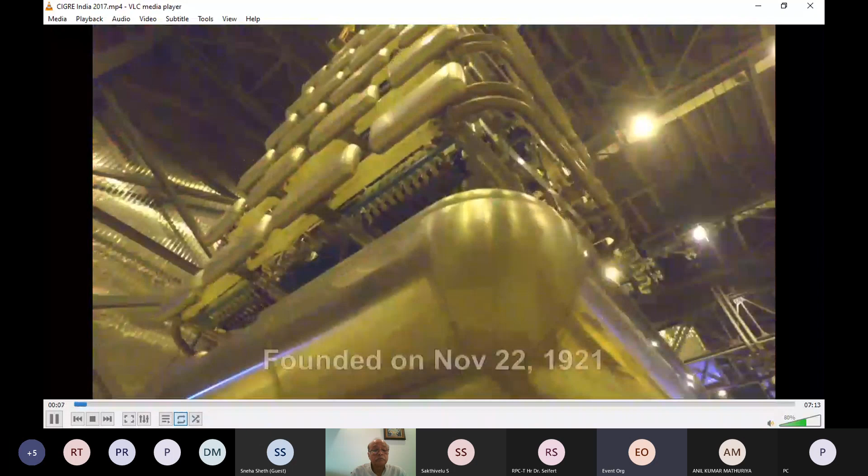CIGRE, the International Council on Large Electrical Systems, is the World Forum for Power Systems, founded on November 22, 1921 in Paris. CIGRE deals with issues related to the development, operation and management of electric power systems, as well as design, construction and maintenance of equipment and plants.

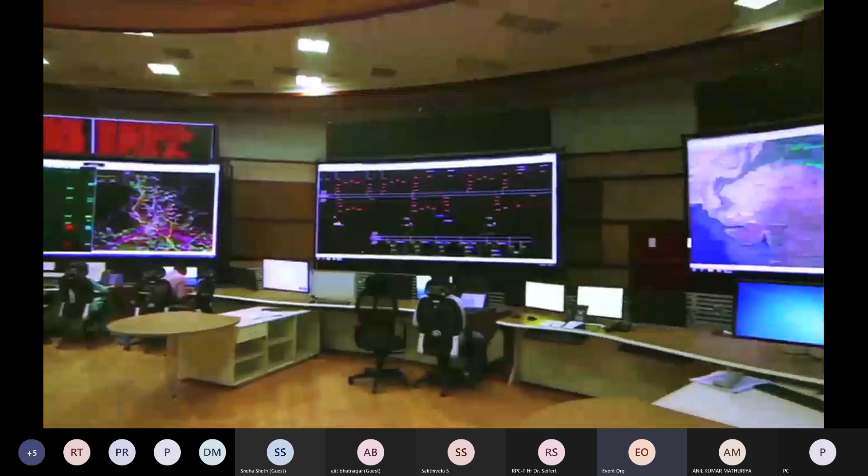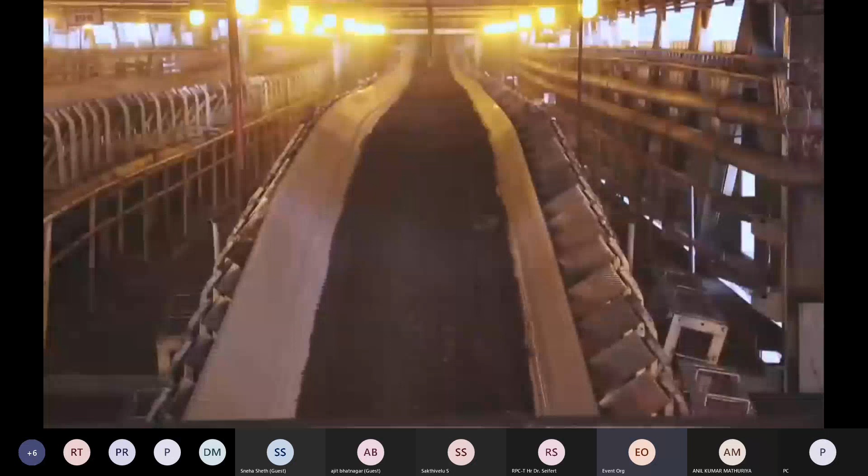The mission of CIGRE is to work with experts from all around the world by sharing knowledge and joining forces to improve the electric power systems of today and tomorrow. It mainly aims at coordination of research, exchange of experience, and scientific and technical information on the operation and design of electric power systems. CIGRE is an association that promotes the exchange of the latest generation of technical knowledge and brings innovative ideas to support industry needs.

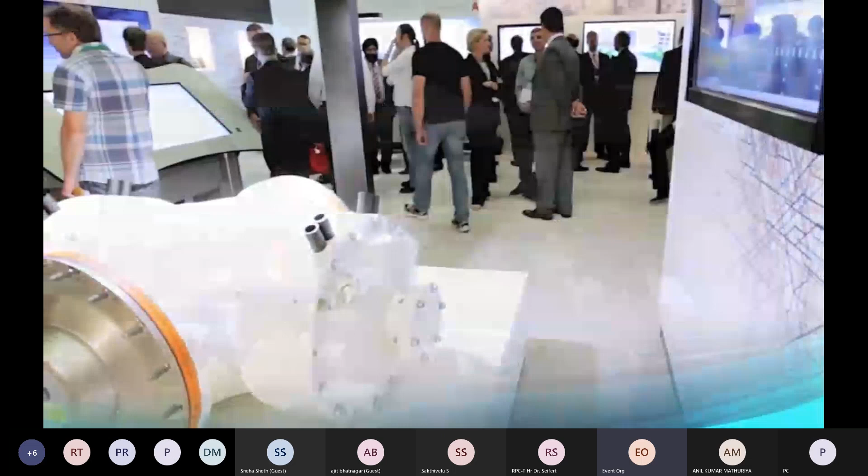CIGRE's strategic directions are best use of existing systems, unbiased information for all stakeholders, environment and sustainability, and future power systems. The challenges are renewable energy sources, growing environmental requirements, limitations to building new transmission infrastructure, architecture of networks, operation of existing power systems, transmission of large amounts of power over long distances, cyber security, and intermittency of renewable power generation.

CIGRE operates through 16 committees on different subjects having members from various countries. These committees are divided into 4 groups. Group A, Equipment, with study committees A1 Rotating Electrical Machines, A2 Transformers, A3 High Voltage Equipment. Group B, Technologies, with study committees B1 Insulated Cables, Overhead Lines, Substations, HVDC and Power Electronics.

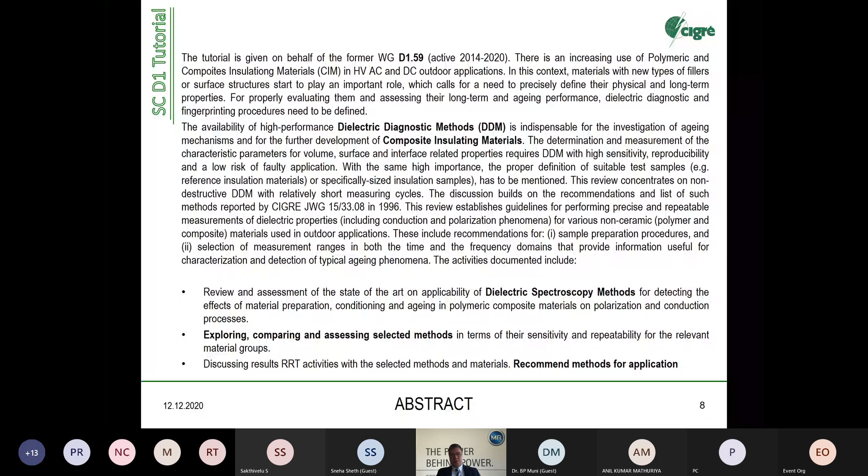So we will talk about composite insulating materials. Composite insulating materials are today considered an emerging technology. If you look into cable insulation, composite insulators, dry type transformers, all these oil-free, SF6-free apparatus work with these composite insulating materials. And the uncertainties are here.

That's one of the main troublemakers in composite insulating materials, which are interfaces. Interfaces can be a macroscopic interface between silicone and epoxy, or between metal and this composite material, or you can also have microscopic interfaces. Microscopic interfaces are interfaces between a matrix system and a filler, for example quartz powder, alumina, or glass fibers. And interfaces may be very complex.

So these are the standard ones taken for theoretical investigations. Typically you can have a normal interface or a normal-directed interface. You can have a tangentially directed interface, or a mixture of both. When you think about glass fiber reinforced polymers or mineral filled polymers, you have a very diverse and wide and complex arrangement of interfaces. But to understand which kind of interface is dominating, these three models, normal, tangential, and normal-tangential, are defined.

Going back to the actual polarization effects in solid dielectrics, this is taken from a book, from lectures of professors, of course - it's not a new invention. What we have to look at today is time starting from some microseconds to hours, months, and years. The polarization mechanisms behind are mainly driven by space charge polarization, so ionic polarization, hopping polarization, and orientational polarization - dipoles. That's the range we are looking into when we talk about composite insulating materials.

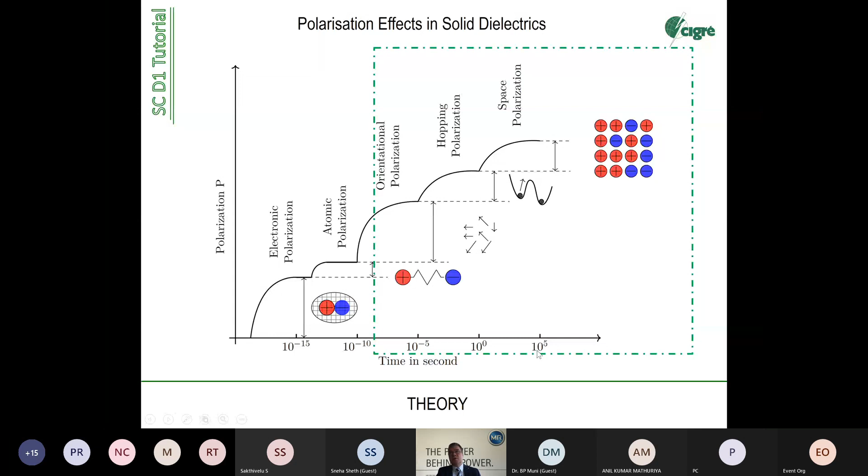For example, in this range of space charge and ionic polarization, we mainly talk about the Maxwell-Wagner effect. Maxwell-Wagner effect is a dominating effect in composite insulating materials since it acts at interfaces - you charge or discharge space charges or ionic particles in and along interfaces. So the Maxwell-Wagner and so-called accumulator effects are the main effects we have to look into. And what we also can see here is that we have to look at long times. Long times means low frequencies.

So after reviewing the available procedures and methods, we found very nice methods coming mostly from universities and scientists, which are called time domain spectroscopy, TDS. It's a very interesting way to analyze materials. It's given here on the left side as a very simple scheme.

So you have a stimulation - normally a step voltage - and the step voltage has a response which is called current response, and this current response is given by the quality and nature of the dielectric. Here's the theory behind it: you have a polarization contribution and a conductive contribution - here's the polarization, here's the conduction. You normally use a kind of Laplace or Fourier transformation, DFT, to transform the response function into a spectrum, into a frequency spectrum, and from this frequency spectrum you can see what kind of effect is in the material.

It's most probably the most effective method because it's not time consuming and easy to apply. What are the difficulties? Difficulties are measuring the very low currents - these currents range from nanoamperes via picoamperes to femtoamperes. So the main challenge here is to have a noise-free, distortion-free measurement of such low currents. This is possible in shielded arrangements, but we found it's not so good in industrial applications because the required conditions are hard to realize.

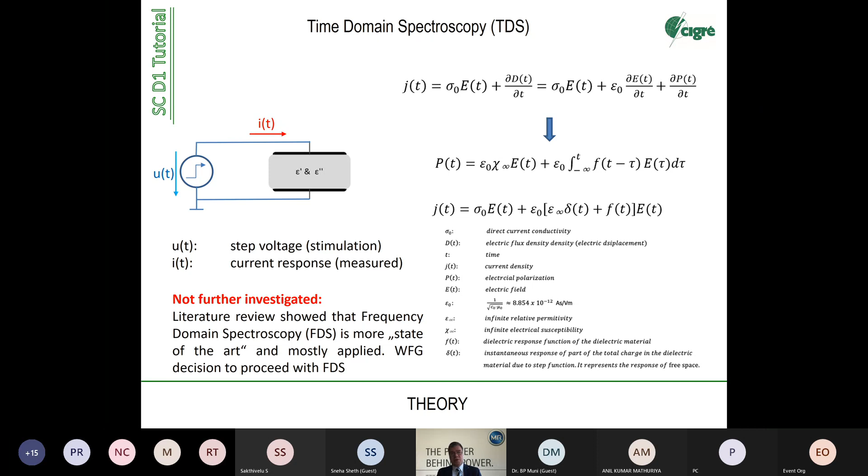Interesting methods - you find a lot of papers given in the literature review, and it's also used in transformer diagnostics, by the way. It's very close to applications, but for materials, we selected this method here.

It's a frequency domain spectroscopy, also called FDS. In FDS, you take a voltage phasor as a stimulation signal, and you get the current phasor as a measuring signal, as a response - this is a very simple arrangement. You normally vary the frequency, starting at very low frequencies in the range of some millihertz, then sweeping into the kilohertz and megahertz range, and you get this current response function, which is also divided into a capacitive part - a response given by the permittivity - and also a contribution given by the conductivity.

So both methods consider conduction effects and polarization effects. From this calculation, you can derive the complex permittivity, which is epsilon 0 multiplied by epsilon R1 and epsilon R2, the complex function. In this complex function, you can distinguish between polarization and the conduction part. The conduction part is given here. Both are depending on frequency.

And so derives the tangent delta. Tangent delta is also known as loss factor. The loss factor can also be split into the polarization part, so it's the dipoles where you lose energy by friction, and you also have a loss by conductive mechanism. So it's a very clear and comprehensive theory behind, and it's just about the evaluation of the complex permittivity.

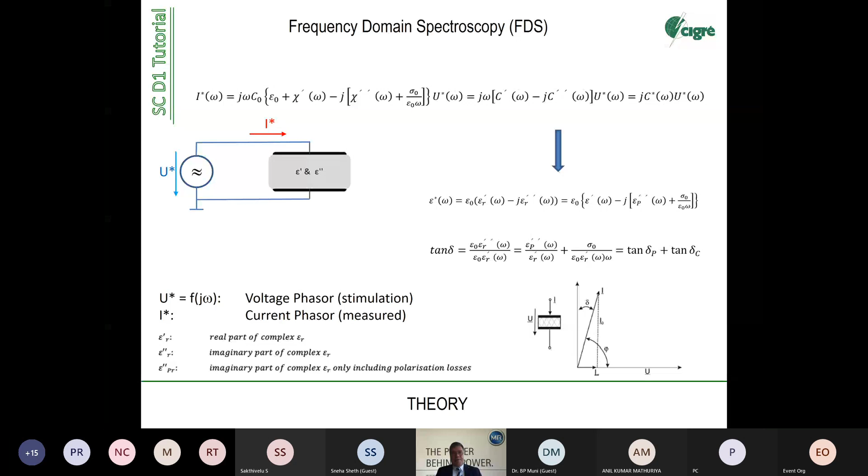So what can we do with the results? This is mainly from a very good book made by Jonscher in the UK, from a Chelsea Dielectrics Group, a dielectric study group that worked in the 1970s and 1980s, which derived a lot of physical mechanisms that can happen in moisture-affected or aging-affected polymers and composite materials. This is a summary of what is written in this book.

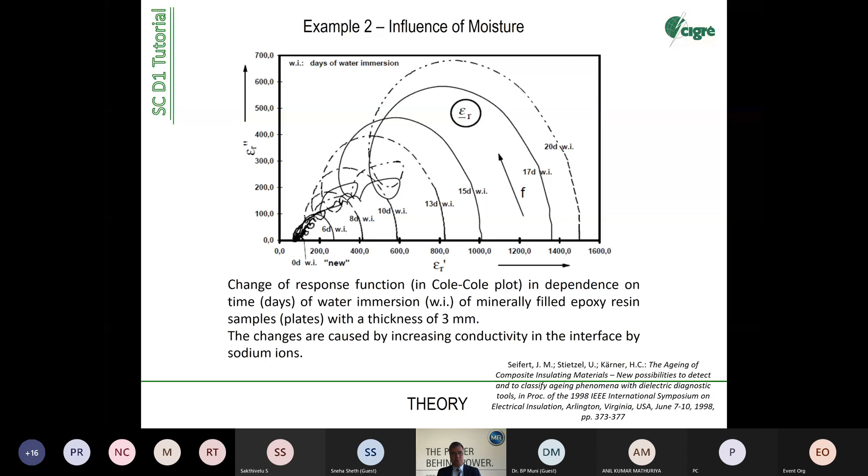example, what is already existing, then work with this literature review. And we have in the brochure 2 references. One is the normal one, starting from 1 to the end, and there's the E1 to E33 or 38, and the E references are for examples. So don't be confused if you read the technical brochure. This was done by intention to distinguish examples from the main literature.

Okay, so we selected the frequency domain spectroscopy. I'll come to this later, why. And also we selected the contact-free method. So you know that in

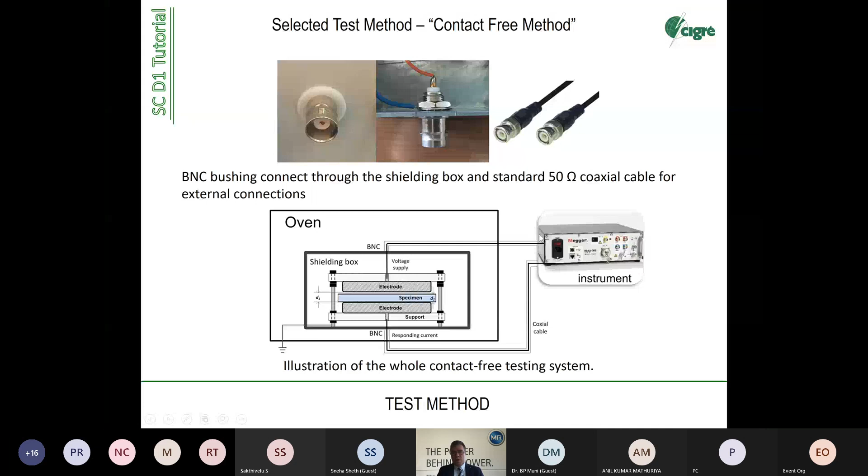Sensitivity analysis - this was really thanks to Professor Derek Oliver from University of Manitoba in Canada, who is in my opinion one of the best experts in this field. He did very theoretical work, also assisted and supported by experimental work in the background, and found that the spatial geometry, given with the delta dr, also has an impact on the accuracy of the correction factor.

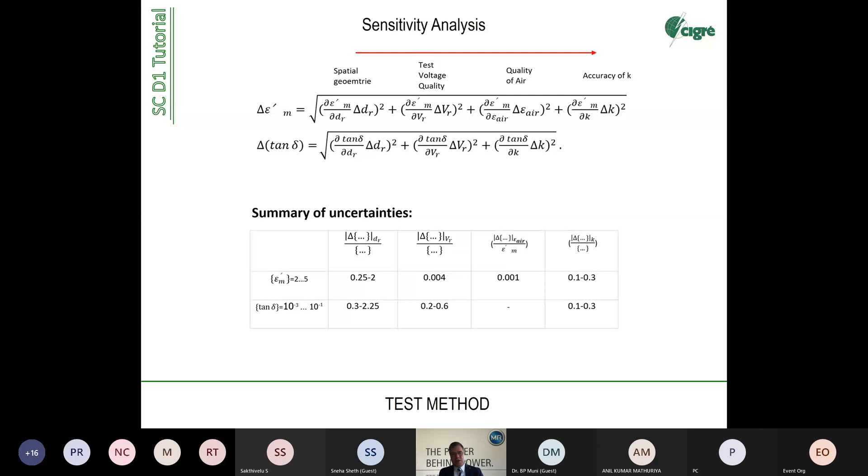For this round-robin test, a sample number of 5 was good. I think for later practical applications, you will not measure 5 cable slides or 5 cable samples because you cannot afford to do it, or you don't have the time or the resources. So this is one thing we have to look at - we have also recorded this in the lessons learned.

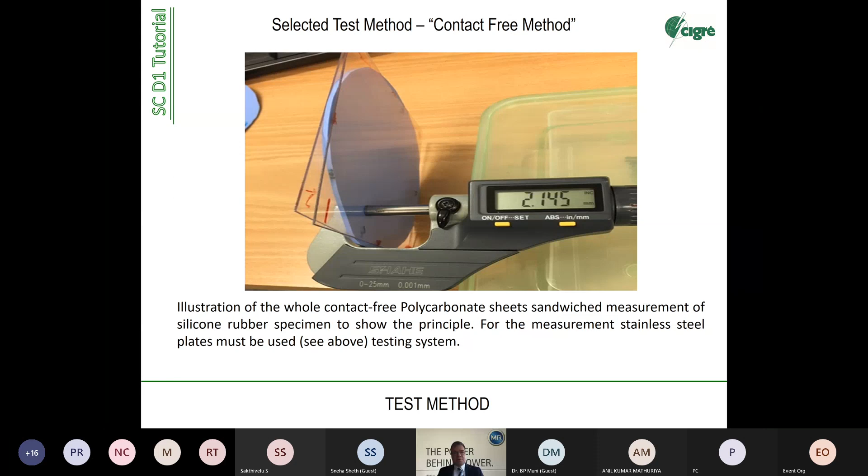Now the theoretical part is more or less finished, so now it comes to the test procedure. In the work on fingerprinting and in the tracking and erosion experiments we did in D127, it was found that we should have a really good test specification. With the test specification and the quality of the test specification, people start to work.

For example, in this working group, we had 7 participants sitting on different continents. One lab is in Canada, 2 were in Germany, 1 in China, 1 in Sweden, 1 in Argentina. So you're not working in one group, you're working under different conditions - the temperature in Canada may differ from the one in China, or humidity conditions may differ.

This is intended. Exactly what we want to do is apply this method, or explore this method, under different conditions, done by different workers, under different control conditions. This is why we do this, because we have to develop a method that is in the end representative, repeatable, and cost affordable. So we have to apply this method in an industrial way at any site we can imagine in the world where we want to get this value.

This is one of the rules, or the 4 rules of IEC. If they are not fulfilled, such a method will not enter the world of IEC standards.

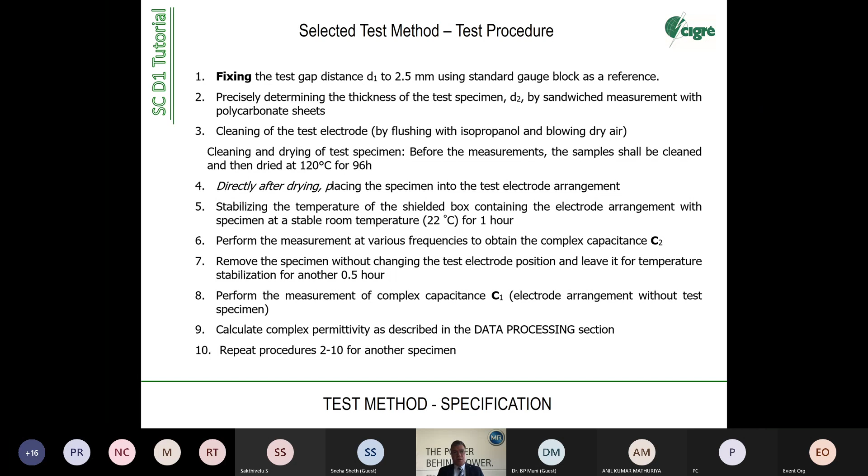Some key hints here: do not move or adjust the electrode system after the reference measurement. For experts it's clear, but lessons learned showed it was different. Fix the gap distance to 2.5 millimeters. Use a shielding box to avoid external interferences. Connect via BNC. Do not use an oversized specimen.

Sometimes you say, okay, my measuring area is 100 millimeter diameter, so take a big plate and put it under the electrode. Don't do it, because it affects the factor K due to the stray field. Determine precisely the average thickness of the specimen as well as the air gap, as these are the main error modes or error contributors. Clean the specimen, and always check the original capacitance data.

There's a self-verification of the equipment, self-testing you have to do, because sometimes these electronic devices are not in a zero status. Secure proper grounding of the measurement equipment. Avoid loose contacts, as these are potential failure points. Maintain stable environmental conditions regarding temperature and mainly humidity during the test. Store the samples afterwards in a dry area, maybe in an oven, if you want to repeat the measurements, or as part of a round robin to repeat it after some days.

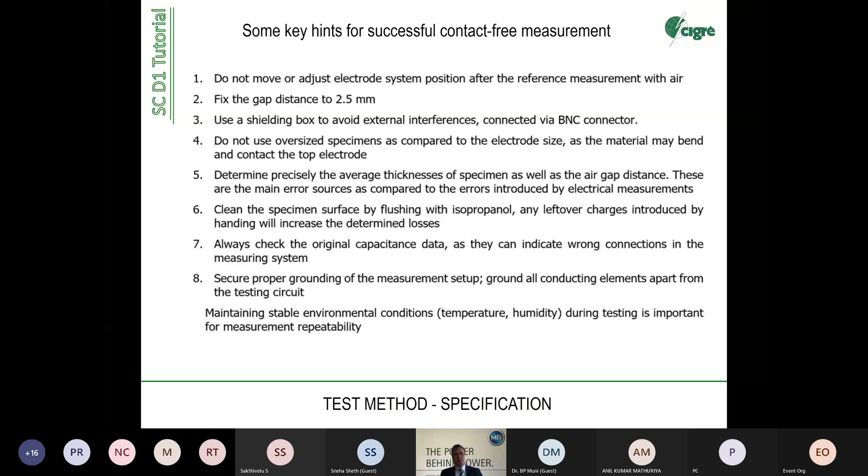Actually, this was our main scope: to work with this kind of characterization of new materials. We had 14 working group meetings, two per year, and the last ones were virtual. You can imagine that when a large group of 30 people or more sits together, a lot of ideas come up. Some of these ideas are good, sometimes we followed them up, sometimes we forgot about them, but here was a good one.

It's water immersion, because as I mentioned before, the microscopic interfaces in composite insulating materials are mainly affected by moisture. So we can trigger potential aging mechanisms with moisture, stressing the material in an easy way. Most probably this is also the dominating aging effect that we see in real field applications. So we defined a procedure: what is water immersion? We dried the samples first at 120 degrees for 96 hours.

With contact-free measurements, we want to measure. We use distilled or deionized water and place the test object in water for 50 days at room temperature. You can even promote the aging if you increase the temperature. There's a rule: if you increase the temperature by 10 Kelvin, according to Arrhenius, you double the process behind it. So if you have a diffusion effect or mechanism depending on this equation, increasing by 10 Kelvin doubles the speed of diffusion of water into the material.

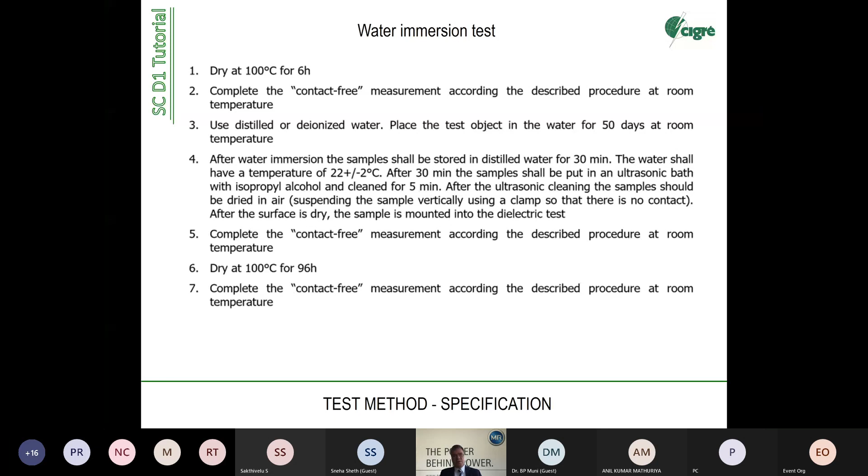Now most of the people are not attending today, but these were the real workers. If you perform a round-robin test, you have to have somebody who makes a test, to spend time, to spend the money. In most cases these were universities, such as University of Manitoba in Winnipeg, Canada, and Chalmers University in Sweden. It was Professor Gubanski, maybe you know him, he's now retired, but he's a great expert in this field of dielectric phenomena.

Professor Kornhuber, together with Professor Bersch from Zittau, are also deep in the field of dielectric materials and testing. Germán Salvo from Argentina, from Edenor, whose company works mainly in diagnosis of equipment. Also the Technical University of Munich, Professor Kindersberger and his team. He's also retired now; at that time he was chairman of SC D1 and main initiator of this work.

Not everybody tested the same materials, but most did tests with HTV rubber, a commercial grade silicone rubber used mainly in composite insulators and cable terminations. Liquid silicone rubber, same application range, going also into cable systems. EPDM from cables and also from older insulators used as housing materials. Epoxy resins, a wide group of materials applied in medium and high voltage equipment, for internal insulation. Most of these epoxy resins are filled with mineral filler, with quartz powder, to set up the desired conditions. So this was the round-robin test.

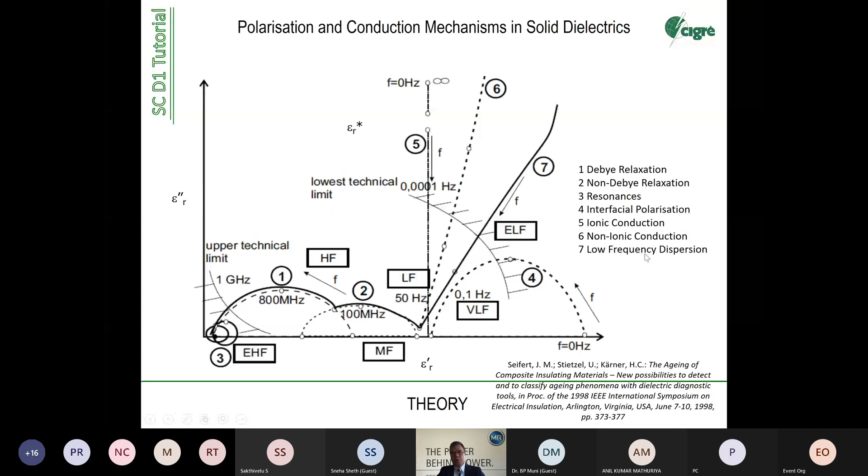So what you see in this curve is coming from here, from the lowest technical limit down to 50 Hertz or even a little bit more. So we go into kilohertz or megahertz area, but we are somewhere here in this falling branch of the so-called low frequency dispersion curve. I go back to the other one, just to give you orientation where we are. So it fits with the theory, and we are looking to the right signal, to the right range, because we are searching for interfaces, for ions, for molecules that are moving, for slow moving effects.

Here, what you can learn is that the scatter seems not to be so high anymore, but you can see a clear tendency. So all test labs for this material show more or less the same dielectric fingerprint.

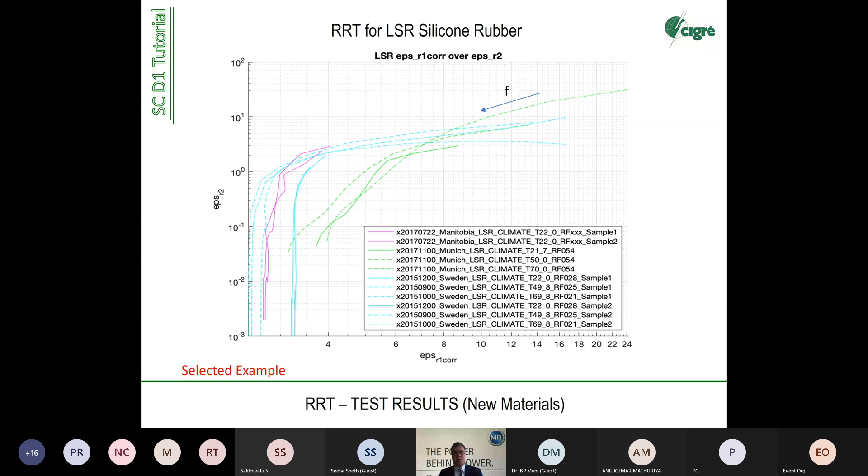Here we investigated an HTV material. We have to say this material is filled in comparison to the liquid silicone rubber. Liquid silicone rubber has no alumina hydroxide filler, so it's a pure material, more or less, with a low amount of interfaces, actually theoretically with no internal interfaces, but they also use some kind of silica to get a mechanical property.

So also these materials have some kind of interfaces, but a low amount. This material here has, by material formulation, a higher amount of internal interfaces, just given by the filler loading, which may be between 50 and 60%. 50% of the elastomer is mineral filler. You can imagine how many interfaces you have between the fillers and the polymer when you think about these particles being in the range of 10 to 20 micrometers. So these are areas of, I think, some soccer fields that you get in a small sample.

Here, very promising at 50 Hertz, very small scatter, also with the air reference method. And in the low frequency range, you see a little bit higher scatter, but the tendency is very clear here, with lower scatter than with the LSR.

Why? We think, or we concluded, that the interfaces give a clear signal, a clear process behind the response, and when this happens, you really measure something that is really going on. So it's not determined by scatter, it's more determined by a real physical process.

Same here, it's the loss part, the imaginary part, the falling tendency. Fits perfectly with the theory. Also, what's shown here is the temperature.

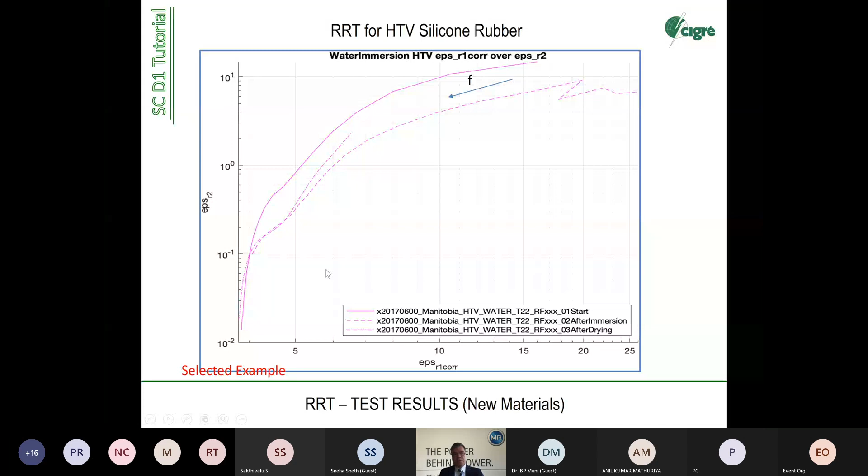This is a signal for EPDM. Also a sharp dielectric response. You have to understand that EPDM material is formulated in a very similar way to HTV silicone. It contains normally also alumina hydroxide filler.

Alumina hydroxide is a polar filler. By its nature, it has a kind of polarization, and of course you have the contribution to the interfaces.

Alumina hydroxide is not only alumina hydroxide, it contains also a lot of water by nature, not only from water immersion or water penetration from outside, but when you manufacture this material, you have a certain amount of bonded water inside. This is by intention, because this filler is used as a fire extinguisher or to set up the tracking and erosion performance.

Tracking and erosion performance is actually like extinguishing fire, extinguishing the arc. So you're using the same philosophy in order to get good tracking and erosion resistance as making a material non-flammable.

That's clear, or at least for us it was clear, that we can have a real interpretation of the results. Also a very strong response here, a clear tendency. There's one, the red curve, a little bit moving out, but I understood later that in China they used not a commercial equipment, they used one built at the university. It was done by Tsinghua University, Professor Liang Xidong.

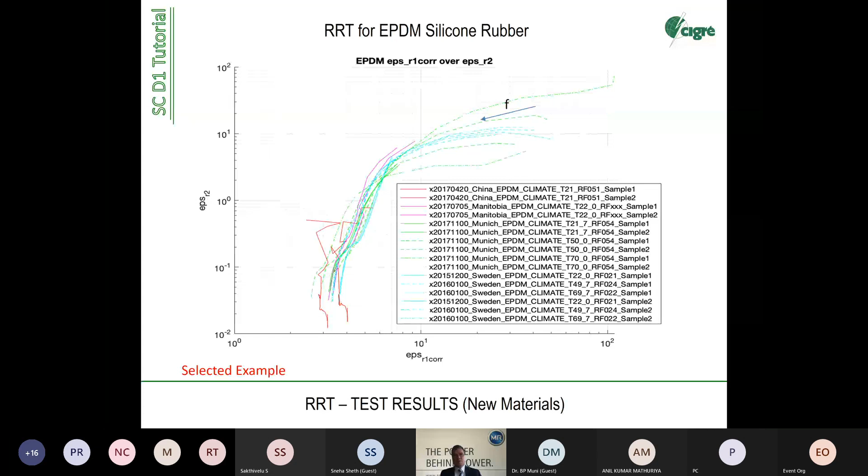Mineral filled epoxy resin, that's what I showed you before, these pictures here. These were the same kinds of materials.

You see one material, because of the interfaces, may be susceptible to electrical overstress. Electrical overstress means treeing, means step-by-step carbonization and growth of channels that may lead to failure after time, so aging time.

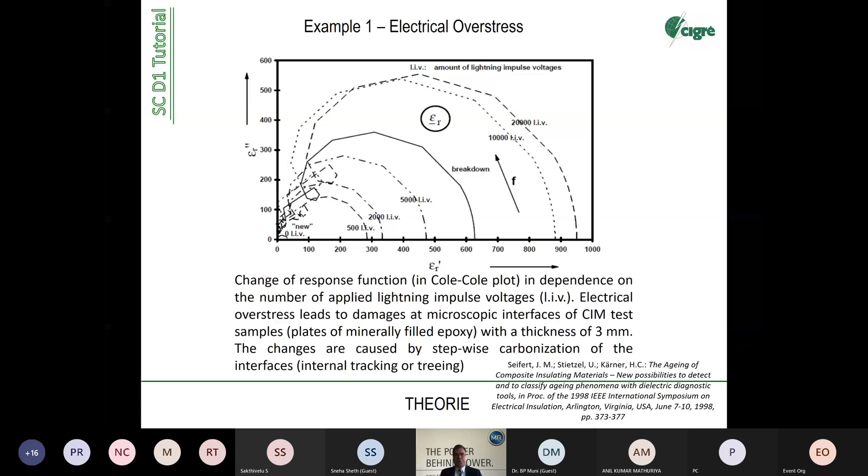This relates also to the inverse power law. You can load the material and it will not show any kind of aging until you exceed the so-called damage limit. Damage limit theory also applies for materials. If you always stay underneath the damage limit, so the voltage stress or the water stress is lower than the damage limit, you don't see any aging. Same here, that's the curve we have to look at, and the round robin test.

You see this is a good quality material because you have not a very strong response, so the response is relatively flat. This is also the case at different temperatures. The reason is simple: this material was a high quality commercial grade using fillers of low alkaline content, low sodium. Sodium is the main contributor to the problem.

Potassium is not so critical because it's not fast moving, but the speed of ions is higher with sodium. So you have to take care that your fillers have low sodium content, and secondly, the fillers must be treated with silane at the surface. Silanization and low alkaline content makes a good filler for a good composite material. Same applies for glass fiber reinforced material, same applies for all kinds of mineral filled materials. Lessons learned here: the quality of materials can be checked with these methods in a very good way.

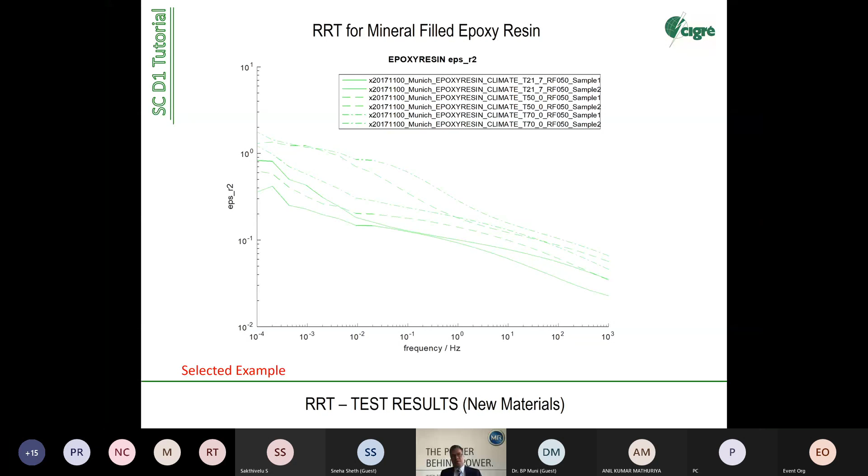Imaginary part also in a low range, with a relatively flat response compared to the others, speaks for the same feature: good quality material. You see again the Arrhenius characteristic when the temperature is changed. But you still see a response, you still see the Maxwell-Wagner effect is active.

Can also be confirmed here. But with all the data, what do you do at the end? You don't need to be an expert to look into such diagrams and decide whether it's good or bad or what you see from it. For later applications, we have to bring this to a quantitative figure, so we can say, okay, here we see a kind of effect, or we see this kind of effect, or we see no effect.

For this reason, we applied the theory of low frequency dispersion. Why low frequency? Because we see in the low frequency range the Maxwell-Wagner effect. We see all the effects that are interesting and important for composite insulating materials.

Why this kind of dispersion, why don't we use Maxwell-Wagner? Because Maxwell-Wagner is not sufficient to describe what's really going on in the material. So we selected a model from Jonscher, number 13 in the references. Very good to read if somebody has an interest to go deeper into this very interesting field of physics. Read this book and you will find a lot of details inside. We have taken out this equation for evaluation.

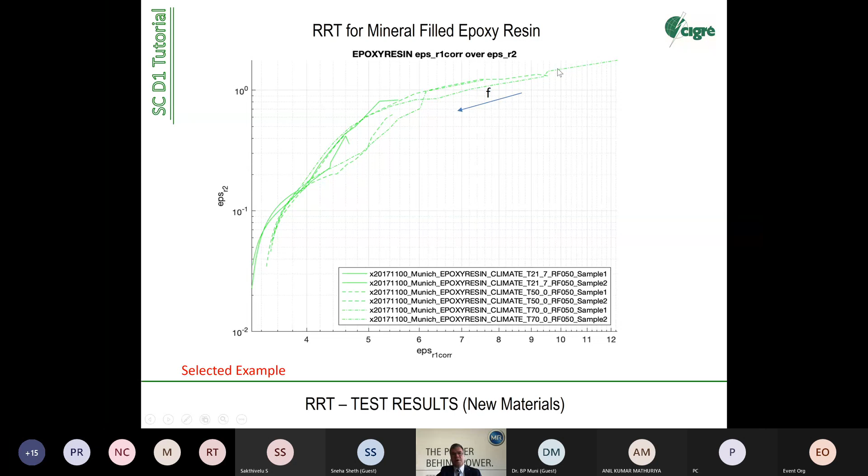And thus we worked with just one N. This N we have to see - N is actually, you have to make a straight line here, an extrapolation. Your software is doing this, so you have to determine the angle of the slope, and from this angle, from this arctangent, you determine by cosine of arctangent from these values in the logarithmic figure, you get out N.

So Stefan has done this by means of self-made computer software in order to have all diagrams under the same observation and under the same evaluation.

And in literature, you find the following values. So normally I explain how you do it: you take this slope, from the slope you get the angle, from the angle you get with the cosine function, you get N.

With N, you can look into Jonscher's theory. For example, if you see an N of 0.8, you have a dipolar response. If you see two modes, like here - we have some with two modes - then we have a dipolar response, and the lower one is a conductive response. So it's a mixture of two. You can filter out different modes of polarization and conduction.

This is also a lesson learned. We need a software like an expert system to find out, to detect what's in your materials. That's for the next group, for the continuation of this work. We need an automatic device that gets out of the plot these kind of N values. This is also given to the big suppliers of equipment like Megger, or I don't know what the names are - the companies that supply such test equipment. They could have a software enhancement to get a module for dielectric diagnostics.

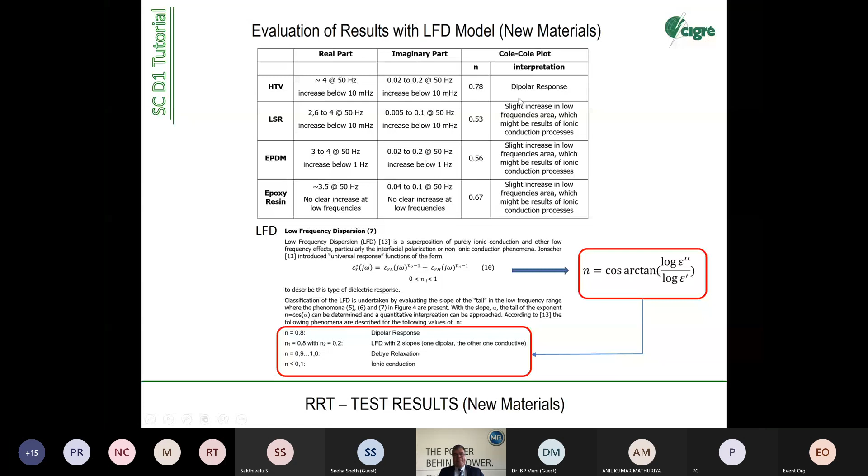The whole thing becomes more interesting when you do water immersion or other aging effects. This is a test that was done additionally - it was not in the plan to do it, but we said, okay, we want to simulate aging. We want to challenge the material, to stress the material, and we have selected water immersion as an aging mechanism for this group of materials.

We used, in this case, as a reference, a good material with a good filler, with epoxy silane treatment. And FRP material we also used to look into it.

Specification for water immersion, I repeat it again. We have to define the way we want to store the material, and we want to have the initial conditions. So what do we do before the storing, and how do we handle it during the procedure? Very important - many scatter results came out of not knowing what to do and how to do it.

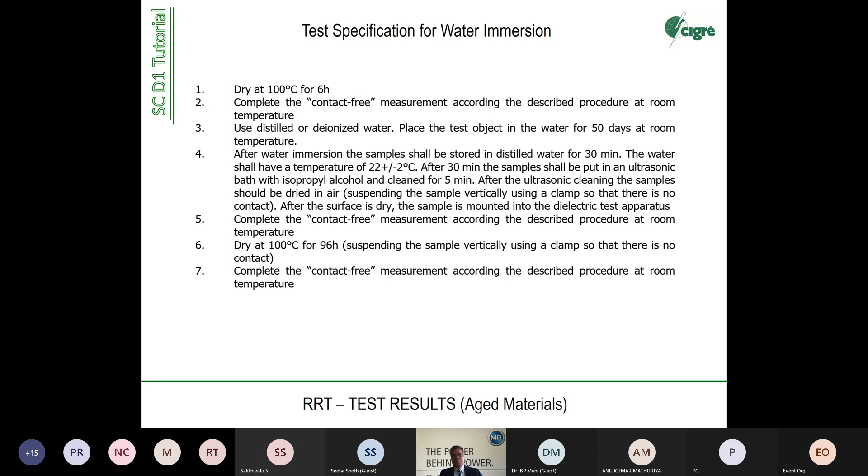So we are not fully at the target, so we need to do more, the group needs to do more. In my opinion, it's easier to work on an application because your capacity and the material input is much higher, so the likelihood to have a disturbance on a bigger volume is lower than disturbing a small test sample. It's only my idea, but we can discuss later.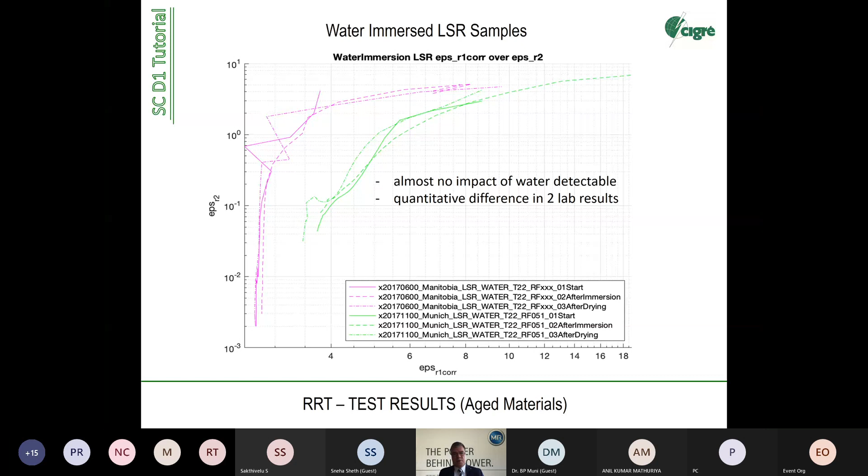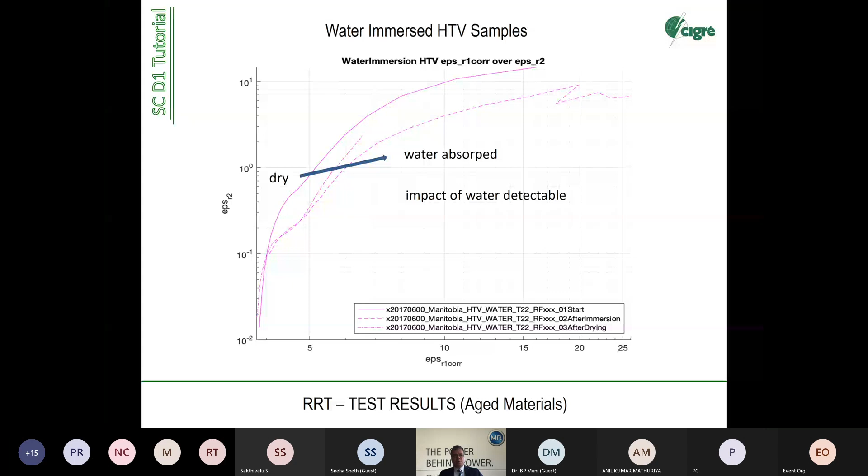Here it's an HTV sample. Keep in mind, minerally filled, aluminum hydroxide, 50% by weight. So we see a clear tendency here from the dry response to the water absorbed response, and you can say it's clearly impact of water is detectable. Not a surprise here because besides the polymer matrix, the filler is the same.

We see impact of water also here. It's affecting both - it's affecting the loss situation because you dissolve alkaline sodium ions. They are still in minerals, you never get them out completely. And of course, you have water at the interfaces. Water itself has an epsilon R of 81, so any kind of water in this interface will increase both epsilon 1 and epsilon 2.

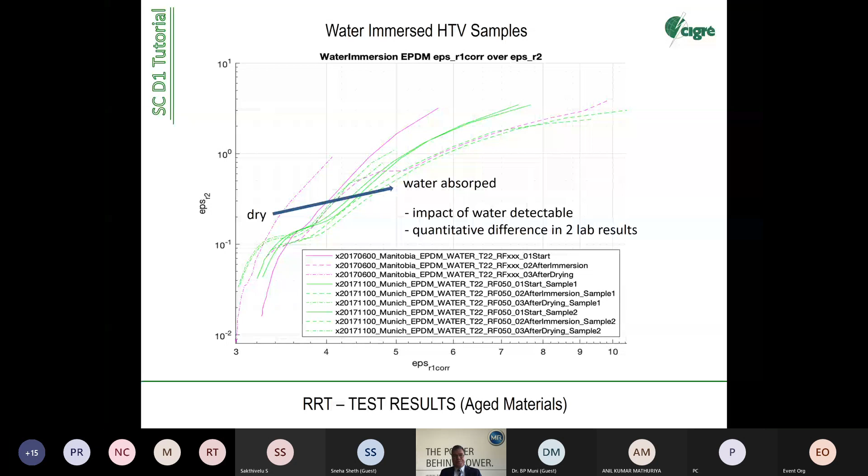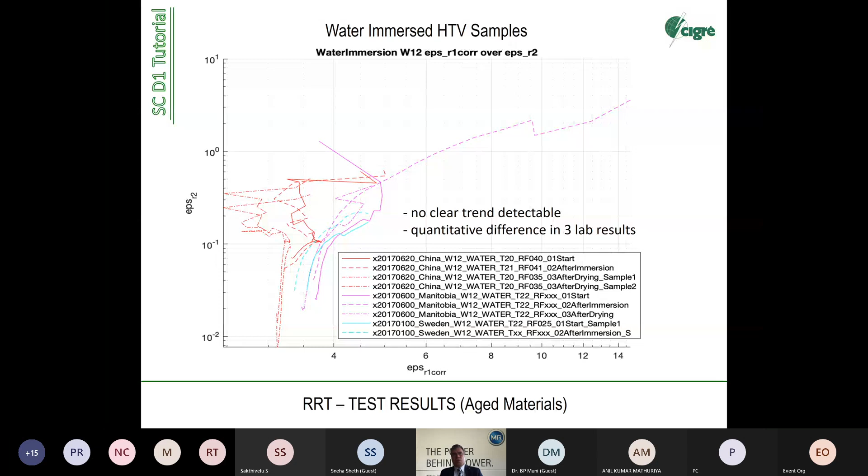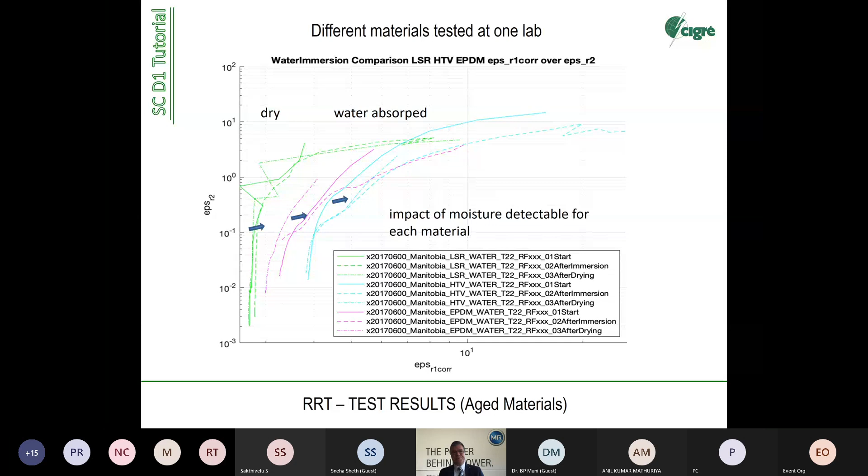Here we have studied different filler surface treatments, and here now I'm on the right way. Strong impact on W12, so no surface treatment - you see a big move from initial conditions to water immersed conditions. And you have a minor impact on the surface treated quartz filler in epoxy. So that's very clear, which means we can detect quality of interfaces, of microscopic interfaces. We can detect good, or we can distinguish between good and bad materials.

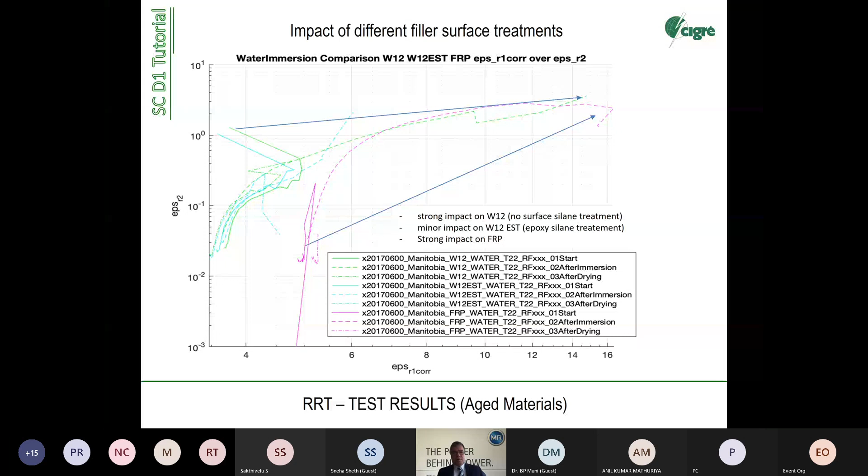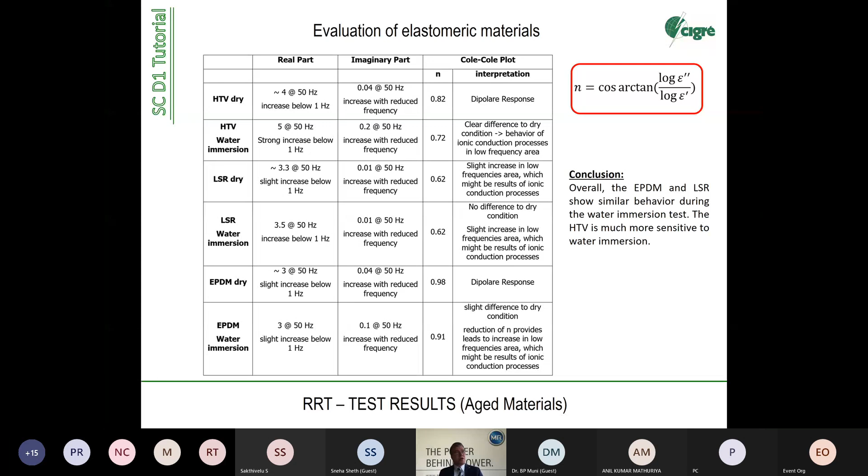Ionic conduction, by the way, in most electrical materials is the starting point for compromising or lowering the electrical strength, because when we talk about thermal initiated breakdown, which is one of the long-term breakdowns, it's driven by a self-accelerating loop: increasing temperature because losses increase during stress. Losses increase with temperature, and so on, temperature increases, so materials run into thermal electrical breakdown, and this could be a warning sign.

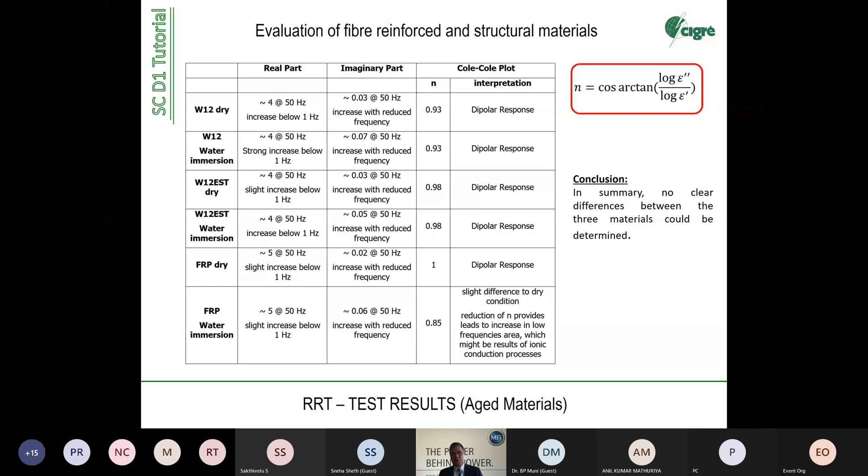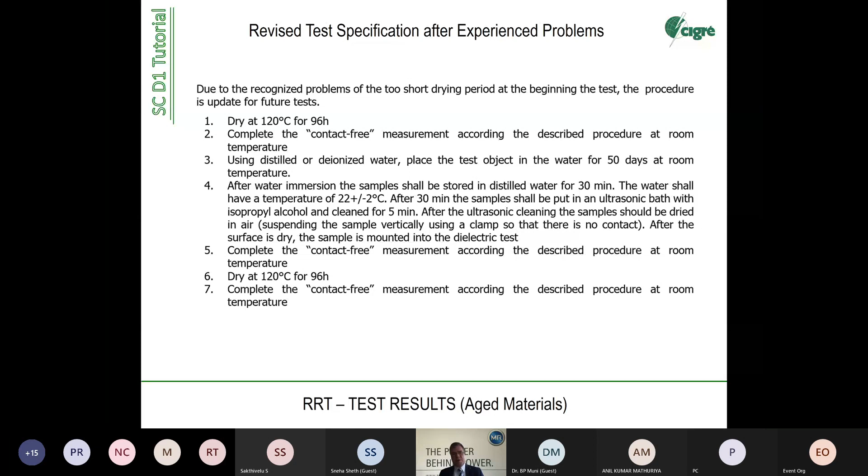Afterwards, that's also a loop you have to do in a round-robin test - sometimes painful, but necessary. So we have to make a review of the test specification. This normally you do with the experts who really have gained experience. Stefan did this in a separate review meeting, not with the whole group, but just with the people who contributed and made the test. So we came to a better test specification here.

Then finally, we did another one because at that time, maybe 5-6 years ago, there was a big rush and hype regarding acid attack to polymeric materials, which occurred under certain conditions. Some people in the working group tried to steer the scope in this direction because it was very present at the time and feared as a big hazard to the industry.

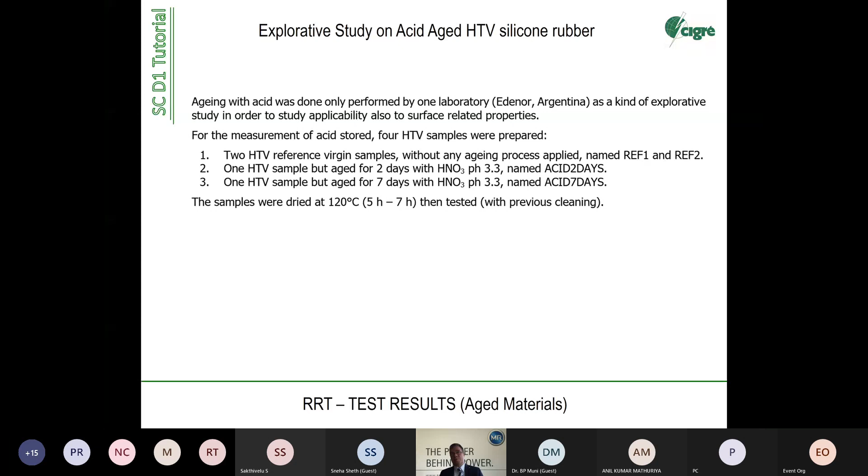So for this reason, we said, okay, let's try how we can detect such acid attacks. Acid attack is mainly to the surface, by the way. When we look into acid attack on polymers, the depth is some 100 micrometers, and then it stops because it's a self-protecting layer. But let's have a look at the results.

Acid aging here - yes, you see responses, but no clear effect of the acid because the acid stays at the surface, and these methods that we have defined are methods for the bulk material, for the volume. So the answer is very easy: we cannot detect surface-related aging effects with such a method. We need to look into bulk materials.

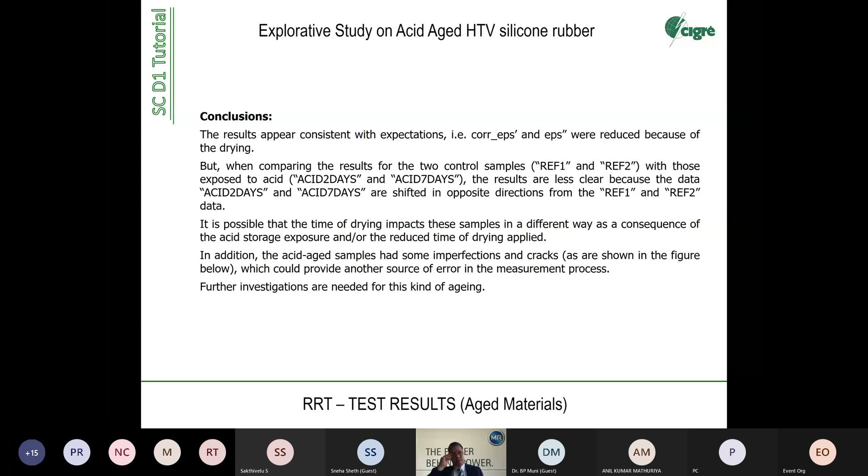Now a little bit over time, but I think I come now to the conclusions and recommendations. The aim of the work was to define methods for dielectric diagnosis and to perform round-robin tests on new, initial and fresh materials. We were also ordered to get a good literature review from everything published in IEEE, CIGRE, and other scientific papers.

We did this, it's documented, all the documents are available. If somebody wants to have them, the group can supply them. We have 3 round-robin tests performed.

The message is the test results can be compared in a qualitative way. We can see tendencies, we can see trends. We even come to the same n values, although our absolute values are not the same, but the fingerprint in the diagram always looks the same, though it lies in different quantitative areas.

It's like a radar screen - you see, okay, it's a ship, but you do not see where it is. So it's like the total adjustment is missing, and we are not having an answer to this right now. It's an open question why this happens.

The effect of humidity is clearly detectable. The definition of the initial conditions is crucial for comparing the results. It's also clear afterwards - at the beginning, it was not clear.

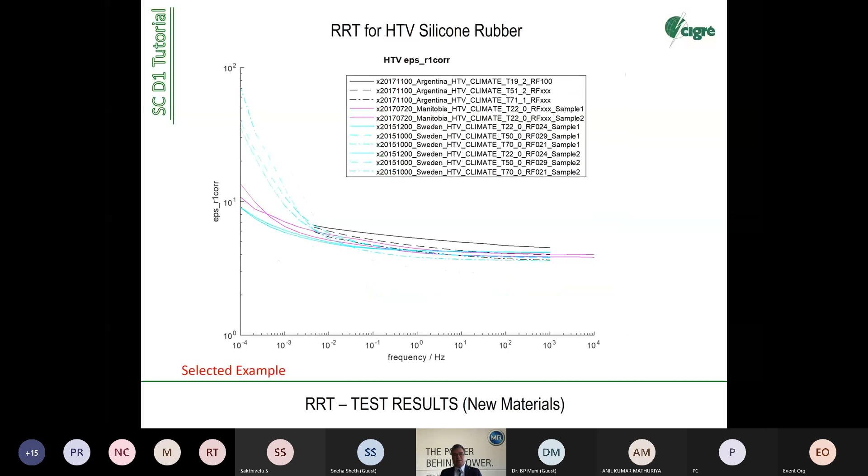So I thank you very much. This is the end of my presentation, but I want to give one final slide that maybe will enter a lot of discussions now. I want to conclude and close the presentation with this slide. Thank you very much, and I'm happy to hear your comments and discussions.